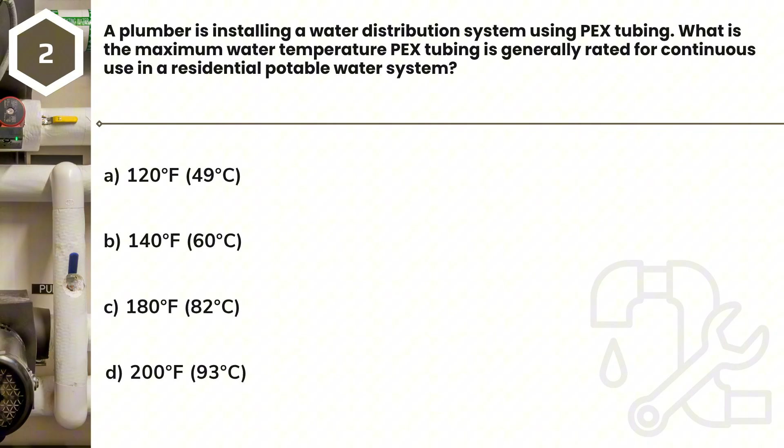Answer: C. 180 degrees Fahrenheit, 82 degrees Celsius. PEX, cross-linked polyethylene, tubing is a popular choice for water distribution systems due to its flexibility and durability, and it is generally rated for continuous use up to 180 degrees Fahrenheit, 82 degrees Celsius, at 100 psi, making it suitable for hot water lines and typical residential and commercial applications.

This temperature rating is crucial because exceeding it can compromise the material's integrity and lead to system failure. For example, if a PEX line were used directly on a superheated industrial system, it would likely fail. Always verify the specific pressure and temperature ratings for any pipe material before installation to ensure code compliance and system longevity.

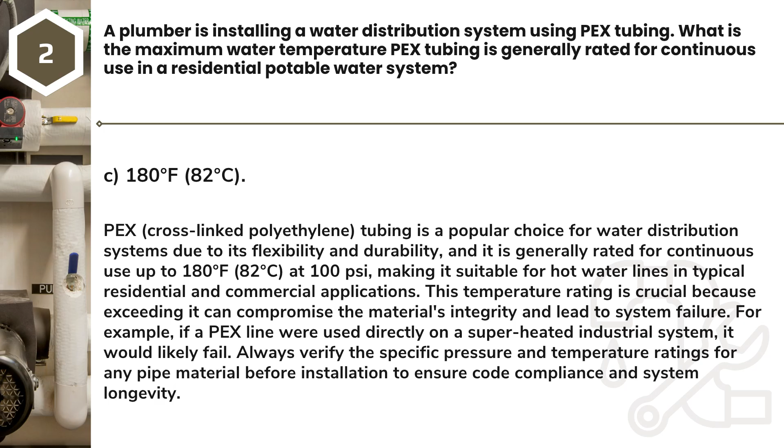Question 3. What is the primary purpose of a trap seal in a plumbing drainage system? A. To prevent sewer gases from entering the building. B. To increase the flow rate of wastewater. C. To provide an access point for drain cleaning. D. To equalize pressure within the drainage pipes.

Answer: A. To prevent sewer gases from entering the building. The primary purpose of a trap seal, which is the water held within the bend of a fixture trap, like under a sink or toilet, is to create a physical barrier that blocks noxious sewer gases from entering the occupied spaces of a building. This water seal prevents foul odors and potentially harmful gases, such as methane or hydrogen sulfide, from migrating back into the home from the drainage system.

Without a proper trap seal, residents would be exposed to unpleasant smells and health hazards. Remember, if a trap seal evaporates or is siphoned out, the protective barrier is gone, allowing gases to enter.

Question 4. A contractor has completed a plumbing installation for a new commercial building. Which of the following is typically the final required inspection before the system can be put into service? A. Rough-in plumbing inspection. B. Underground plumbing inspection. C. Final plumbing inspection. D. Slab plumbing inspection.

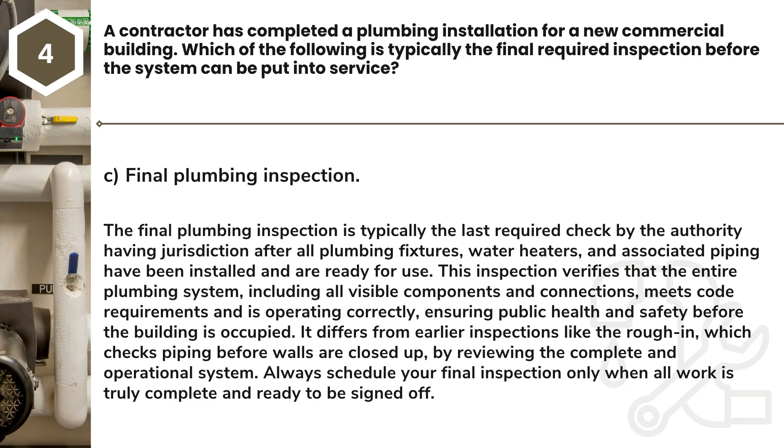Question 5. What is the minimum grade, slope, required for horizontal drainage piping that is 3 inches in diameter, according to common plumbing codes? A. 1/16 inch per foot. B. 1/8 inch per foot. C. 1/4 inch per foot. D. 1/2 inch per foot.

Answer: C. 1/4 inch per foot. Common plumbing codes, such as the Uniform Plumbing Code, UPC, typically require a minimum grade, slope, of 1/4 inch per foot for horizontal drainage piping up to and including 4 inches in diameter.

This specific slope ensures that wastewater flows efficiently by gravity, preventing solids from settling and accumulating within the pipe, which could lead to blockages. For example, a 3-inch drain line running 10 feet horizontally would need to drop 2.5 inches from start to finish. Proper grading is critical for effective waste removal and maintaining a clear drainage system.

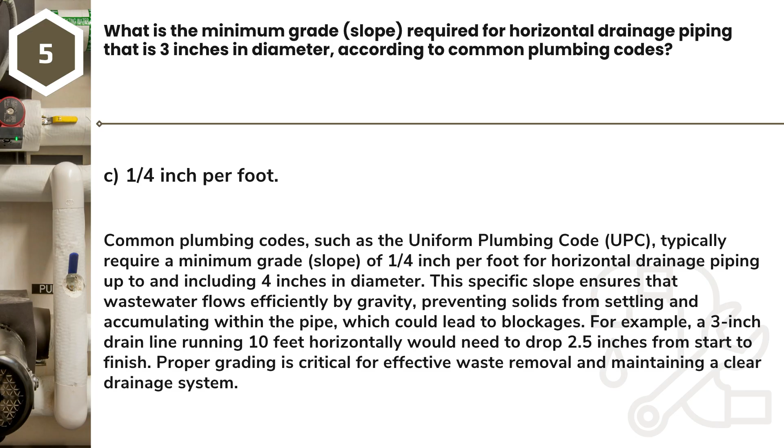Question 6. Under what circumstances is a plumbing contractor typically required to obtain a permit for plumbing work? A. Only for new construction projects. B. Only for work exceeding a certain dollar amount. C. For any installation, alteration, repair, or replacement of plumbing systems. D. For work performed in public right-of-way only.

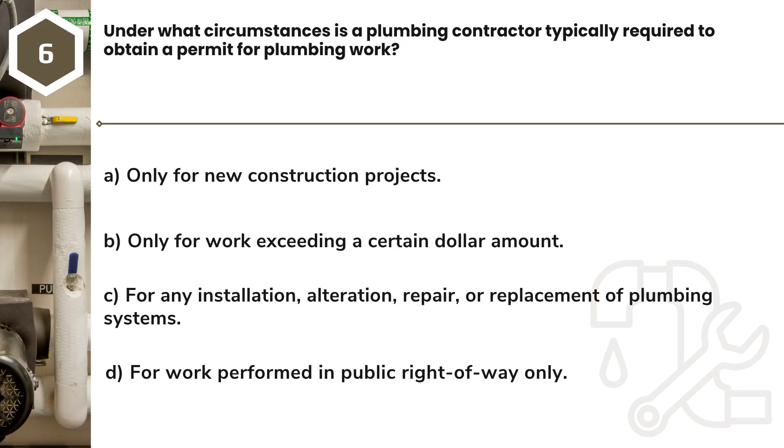Answer: C. For any installation, alteration, repair, or replacement of plumbing systems. A plumbing permit is generally required by the local authority having jurisdiction for almost any work involving the installation, alteration, repair, or replacement of plumbing systems, not just new construction. This ensures that the work complies with safety and sanitation codes, protecting both the property owner and the public.

For instance, replacing a water heater or rerouting a drain line in an existing home typically requires a permit and subsequent inspection. Always remember that permits are essential for legal compliance and to ensure your work meets established standards.

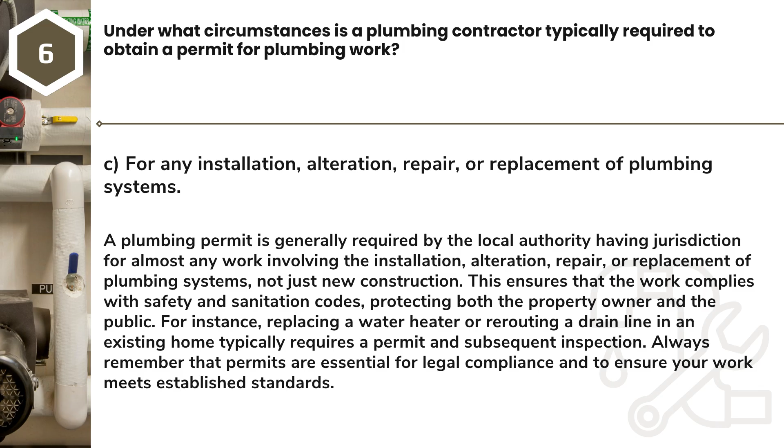Question 7. What is the primary function of a cleanout in a plumbing drainage system? A. To provide ventilation for the drainage system. B. To allow for visual inspection of wastewater flow. C. To provide access for cleaning and maintenance of the drainage pipes. D. To regulate water pressure within the system.

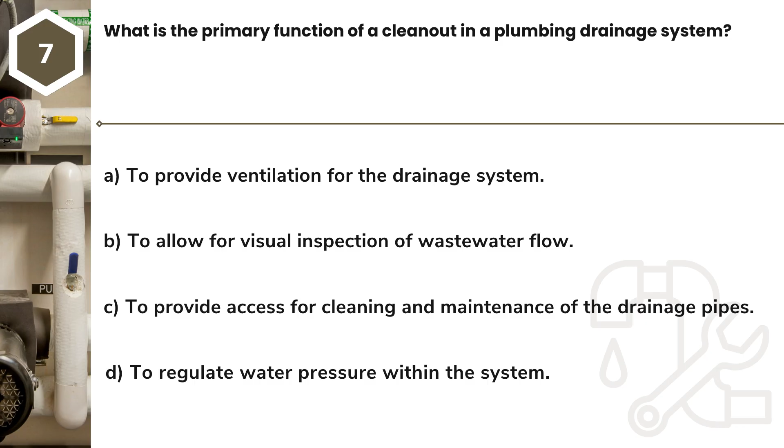Answer: C. To provide access for cleaning and maintenance of the drainage pipes. A cleanout is a fitting with a removable plug or cover that is strategically installed in the plumbing drainage system to provide convenient access for clearing blockages or performing maintenance. Without these access points, it would be much more difficult and disruptive to address clogs, often requiring sections of pipe to be cut out.

For example, a main building drain will typically have a cleanout near the foundation wall to allow a plumber to snake the line if it gets backed up. Proper placement and accessibility of cleanouts are critical for the long-term serviceability of any drainage system.

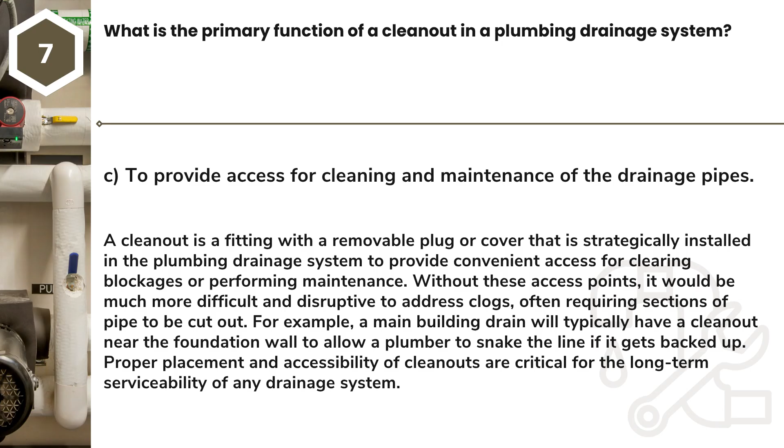Question 8. A plumber is installing a water heater. What is the purpose of the temperature and pressure, T&P, relief valve on a water heater? A. To regulate the water temperature for energy efficiency. B. To prevent the water heater tank from rusting. C. To release excessive temperature or pressure to prevent explosion. D. To increase the hot water output of the heater.

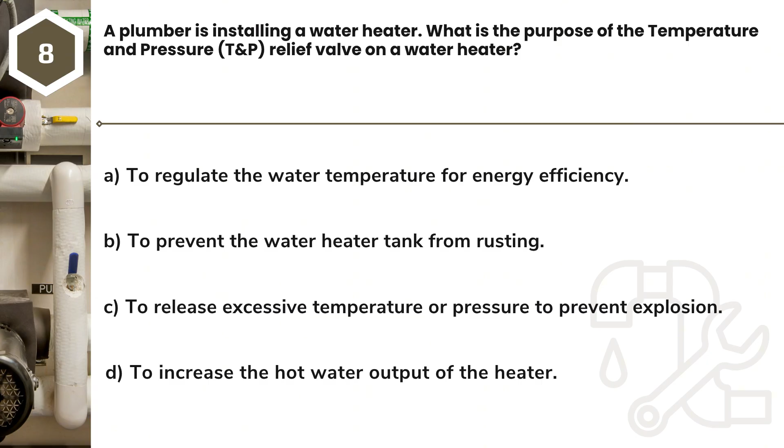Answer: C. To release excessive temperature or pressure to prevent explosion. The temperature and pressure, T&P, relief valve is a critical safety device on a water heater designed to automatically open and discharge water if the tank's internal temperature or pressure exceeds safe operating limits. This mechanism prevents the water heater from becoming a dangerous projectile due to extreme pressure buildup, effectively acting as a

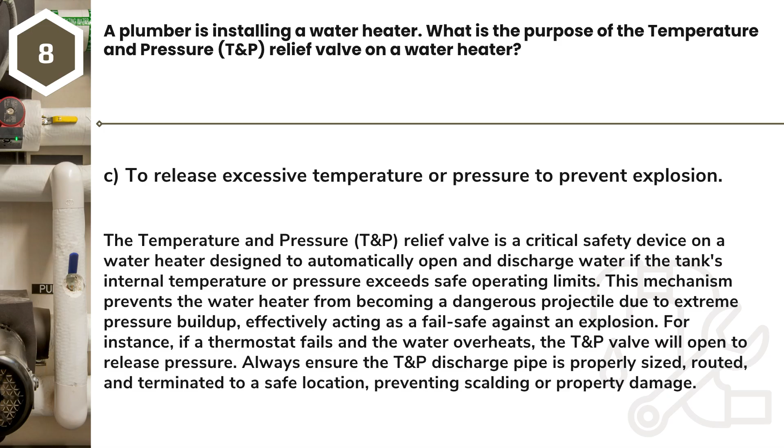fail-safe against an explosion. For instance, if a thermostat fails and the water overheats, the T&P valve will open to release pressure. Always ensure the T&P discharge pipe is properly sized, routed, and terminated to a safe location, preventing scalding or property damage.

Question 9. In California, what is the maximum amount a licensed contractor can charge for a home improvement project before a written contract is required by law? A. $100. B. $300. C. $500. D. $750. Answer: C.

$500. In California, the Contractors State License Law, CSLL, mandates that any home improvement contract for services, labor, or materials must be in writing if the aggregate contract price, including labor and materials, is $500 or more. This legal requirement is designed to protect consumers by ensuring clear terms, pricing, and project details are documented upfront, reducing

disputes. For example, if a plumbing repair is estimated at $450, a written contract isn't strictly required by law, but for a $550 water heater replacement, it is. Always use a written contract for any project approaching or exceeding this threshold to protect both yourself and your client.

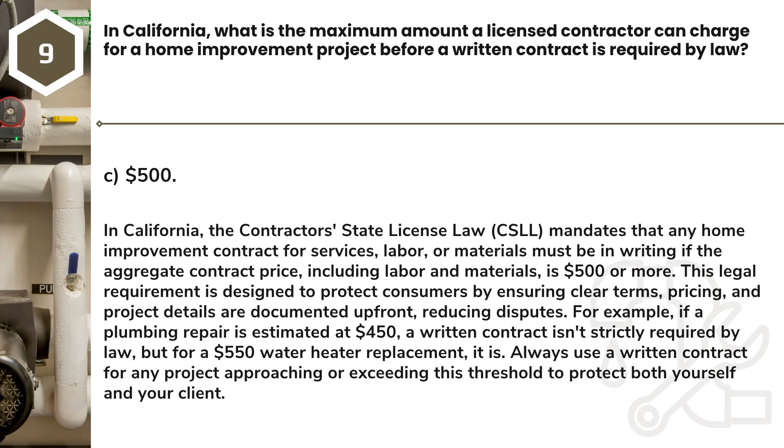Question 10. When installing an indirect waste pipe, such as a discharge from a refrigeration unit, what is the primary reason it must terminate into an air gap or air break? A. To conserve water. B. To prevent backflow contamination of the potable water supply. C. To reduce noise from the discharge. D. To allow for easier cleaning of the drain.

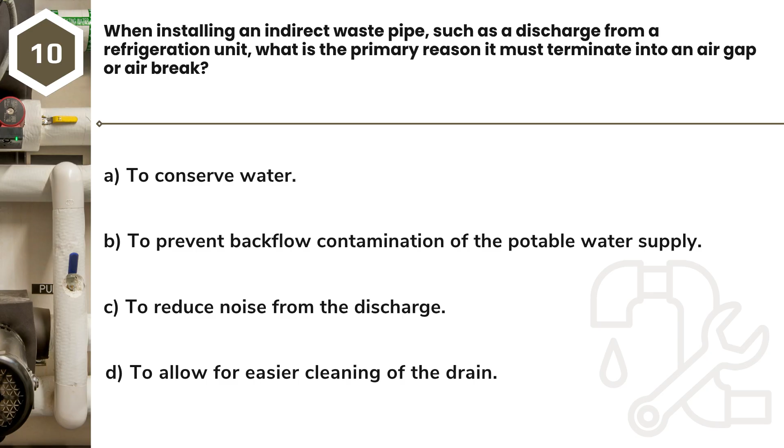Answer: B. To prevent backflow contamination of the potable water supply. An indirect waste pipe, which drains non-sewage waste, must discharge into a plumbing fixture or receptor through an air gap or air break primarily to prevent backflow contamination of the potable water supply. An air gap is a physical separation between the end of the drain pipe and the flood level rim of the receptor, while an air break is a less restrictive form of separation.

This prevents any possibility of contaminated wastewater, such as from a condensate pan or sterilizer, being siphoned back into the clean water system. Maintaining a clear air gap or air break is a fundamental backflow prevention principle to safeguard public health.

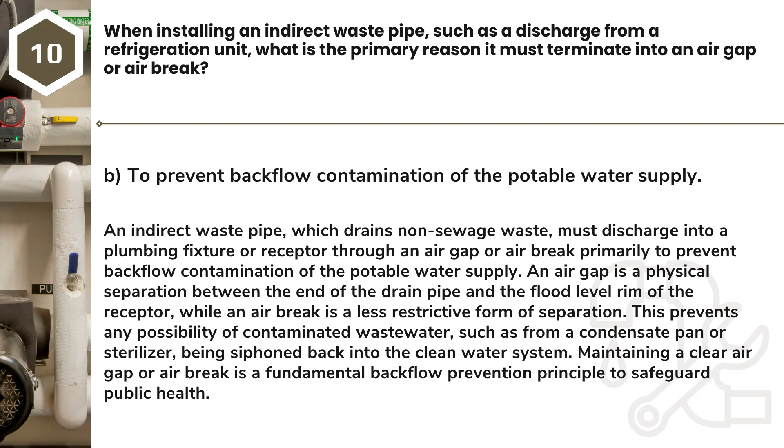Question 11. What is the minimum distance required between a water well and a septic tank system in California for new installations? A. 25 feet. B. 50 feet. C. 100 feet. D. 150 feet.

Answer: C. 100 feet. In California, local health department regulations, often based on state guidelines, typically require a minimum separation distance of 100 feet between a water well and a septic tank system for new installations. This significant distance is mandated to prevent the contamination of the potable groundwater supply by effluent from the septic system.

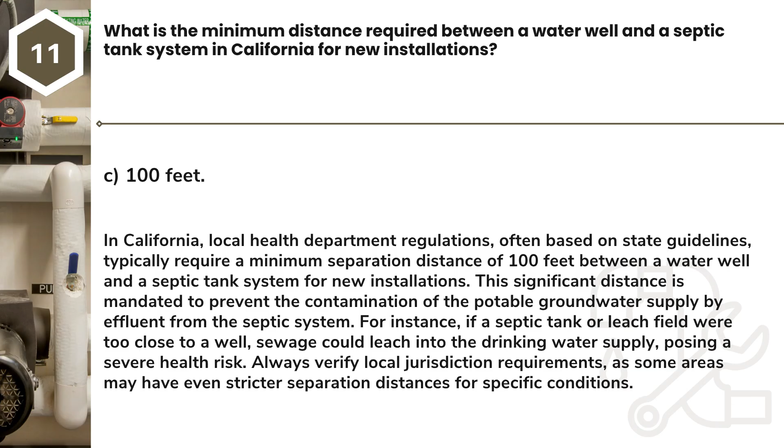For instance, if a septic tank or leach field were too close to a well, sewage could leach into the drinking water supply, posing a severe health risk. Always verify local jurisdiction requirements, as some areas may have even stricter separation distances for specific conditions.

Question 12. What type of backflow prevention device is typically required for a direct connection to a fire suppression system? A. Double check valve assembly, DCVA. B. Pressure vacuum breaker, PVB. C. Atmospheric vacuum breaker, AVB. D. Reduced pressure principle, RP, backflow assembly.

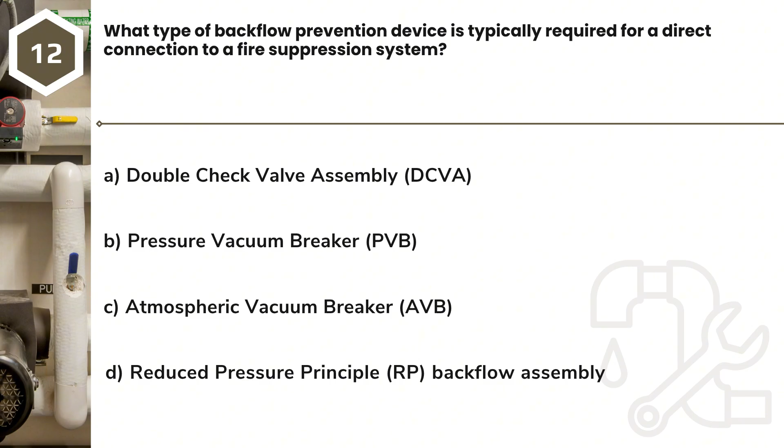Answer: D. Reduced pressure principle, RP, backflow assembly. A reduced pressure principle, RP, backflow assembly is generally required for direct connections to fire suppression systems, especially those that contain chemical additives or non-potable water, because it offers the highest level of protection against both backpressure and back siphonage.

This device features two independent check valves, an automatically operating relief valve located between them, and two tightly closing shutoff valves, ensuring superior contamination control. While a double check valve assembly, DCVA, might be used for some fire systems, the RP is mandated when the potential for health hazard contamination exists. Always select the appropriate backflow preventer based on the degree of hazard and local code requirements.

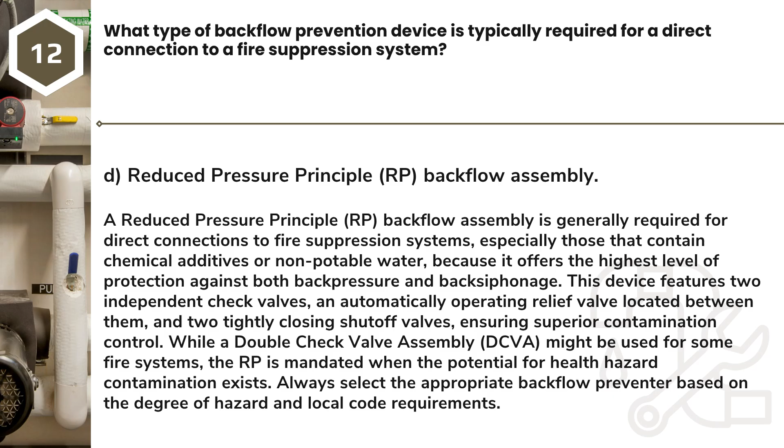Question 13. A plumbing contractor is hired to install a new toilet in a residential bathroom. What is the typical rough-in dimension, center of waste outlet to finished wall, for a standard floor-mounted toilet? A. 10 inches. B. 12 inches. C. 14 inches. D. 16 inches.

Answer: B. 12 inches. The typical rough-in dimension for a standard floor-mounted toilet, measured from the center of the waste outlet, flange, to the finished wall behind the toilet, is 12 inches. This standardized measurement allows for proper placement of the toilet bowl against the wall, ensuring stability and a clean aesthetic.

While 10-inch and 14-inch rough-in toilets are available for specific situations, 12 inches is by far the most common and is what plumbing contractors should plan for by default. Always confirm the rough-in dimensions for the specific toilet model being installed to avoid costly rework.

Question 14. What is the minimum required size for a water supply pipe serving a single residential dwelling unit, according to most plumbing codes? A. Half an inch. B. 3/4 inch. C. 1 inch. D. 1 1/4 inch.

Answer: B. 3/4 inch. Most plumbing codes, including the Uniform Plumbing Code, UPC, require a minimum 3/4 inch main water supply line to a single residential dwelling unit. This minimum size ensures adequate water volume and pressure to supply all fixtures simultaneously without significant pressure drops, even during peak demand.

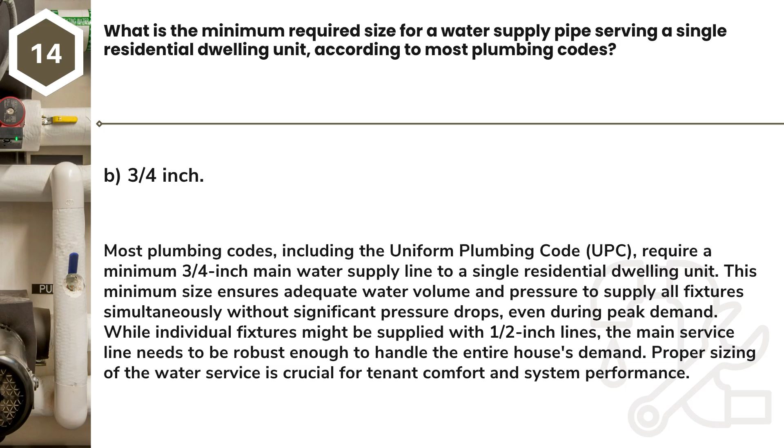Question 15. A contractor is replacing a section of cast iron drain pipe. What is the primary reason plumbers might still choose to use cast iron pipe in certain DWV applications today, despite the availability of PVC or ABS? A. It is significantly cheaper than plastic pipes. B. It offers superior resistance to extreme temperatures. C. It provides excellent sound dampening qualities. D. It is easier to cut and install.

Answer: C. It provides excellent sound dampening qualities. Despite being heavier and more challenging to install than plastic alternatives like PVC or ABS, cast iron pipe is often preferred in certain DWV, drainage, waste, and vent applications, especially in commercial buildings or multi-story residential structures, because it offers excellent sound dampening qualities.

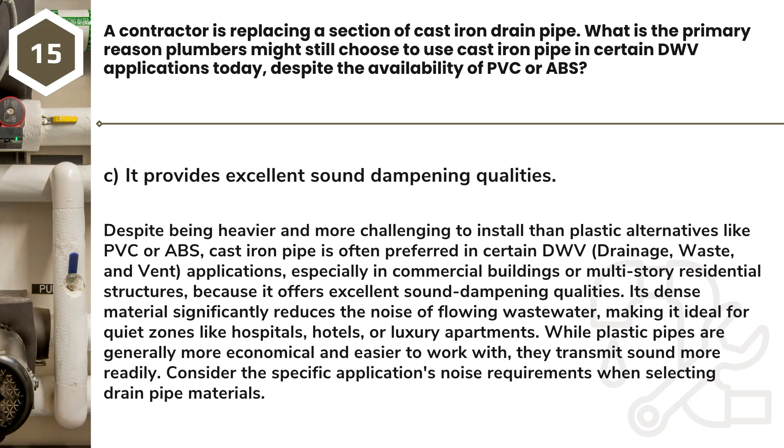Its dense material significantly reduces the noise of flowing wastewater, making it ideal for quiet zones like hospitals, hotels, or luxury apartments. While plastic pipes are generally more economical and easier to work with, they transmit sound more readily. Consider the specific application's noise requirements when selecting drain pipe materials.

Question 16. What is the purpose of a vent stack in a plumbing drainage system? A. To remove solid waste from the system. B. To introduce air into the drainage system to prevent trap siphonage. C. To regulate water temperature in hot water lines. D. To provide a pathway for fire suppression.

Answer: B. To introduce air into the drainage system to prevent trap siphonage. A vent stack is a vertical pipe extension of the main drain that extends through the roof, serving to introduce atmospheric air into the drainage system. This air equalization prevents a vacuum from forming when wastewater flows, which could otherwise siphon the water out of fixture traps, thereby breaking the critical trap seal. Without proper venting, drain lines could gurgle, and sewer gases would enter the building through siphoned traps. Proper venting ensures that the drainage system operates efficiently and safely by maintaining atmospheric pressure within the pipes.

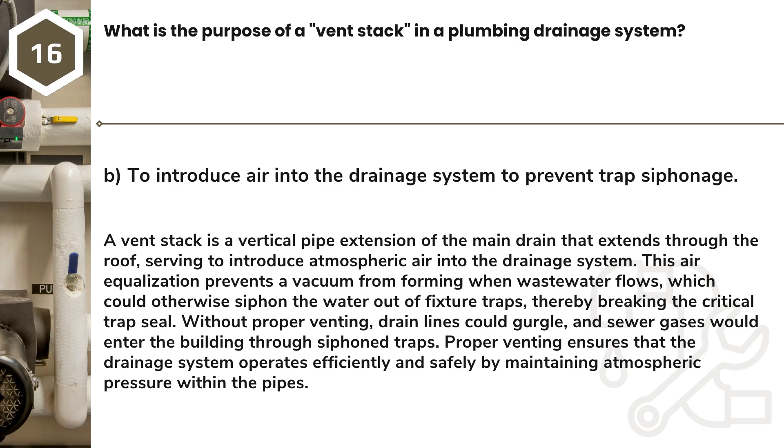Question 17. What is the primary purpose of a weep hole in the base of a shower stall or a water heater pan installation? A. To allow for decorative lighting installation. B. To provide a channel for pest control. C. To allow accumulated water to drain from behind the finished materials or from the pan. D. To provide an anchor point for the shower drain.

Answer: C. To allow accumulated water to drain from behind the finished materials or from the pan. Weep holes are small openings or pathways designed to allow any accumulated water to escape from behind or beneath a finished surface, such as the tile in a shower stall, or from inside a water heater pan. In a shower, they allow water that seeps through grout lines to drain into the shower base's subdrainage system, preventing mildew and structural damage. In a water heater pan, they indicate a leak from the tank, allowing water to escape before it overflows the pan and causes significant property damage. These small but critical features prevent water buildup and potential damage.

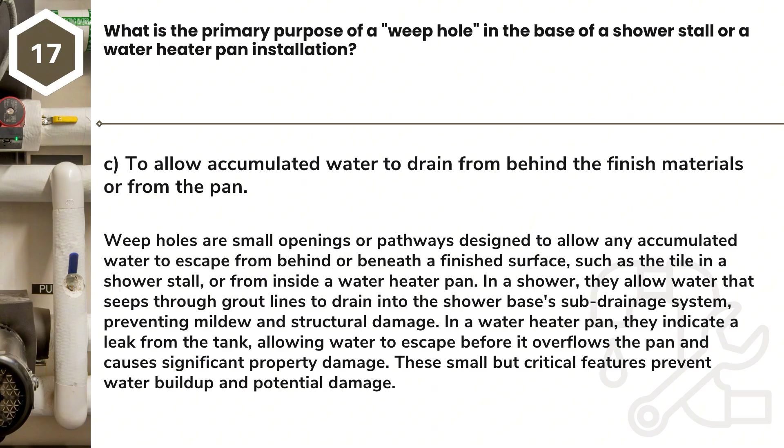Question 18. What is the typical maximum length for a fixture arm, the horizontal pipe connecting a trap to a vertical vent, before it must be vented individually, according to UPC standards? A. It depends on the pipe diameter. B. 3 feet. C. 5 feet. D. 10 feet.

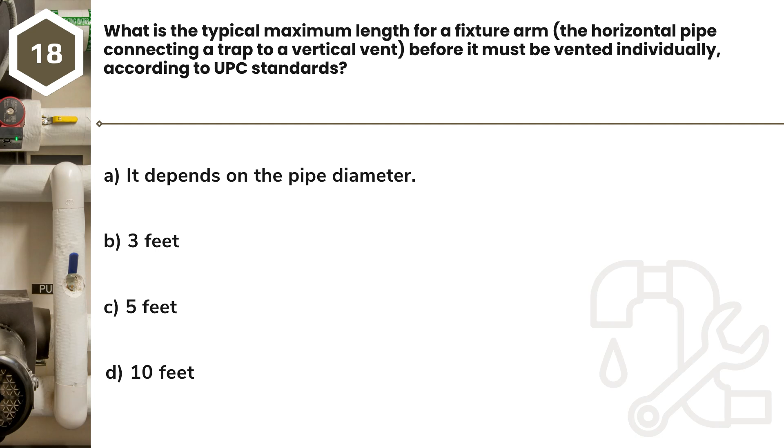Answer: A. It depends on the pipe diameter. The maximum developed length for a fixture arm, which connects a trap to a vertical vent, is not a fixed universal number but rather depends on the diameter of the pipe. For instance, a 1 1/4 inch pipe might have a maximum length of 2 feet 6 inches, while a 2-inch pipe might extend to 8 feet, as per the Uniform Plumbing Code, UPC, tables. This varying length ensures proper drainage and prevents trap siphonage by allowing adequate airflow based on the pipe's capacity. Always refer to the specific plumbing code tables for the exact maximum developed length relative to the fixture arm's diameter.

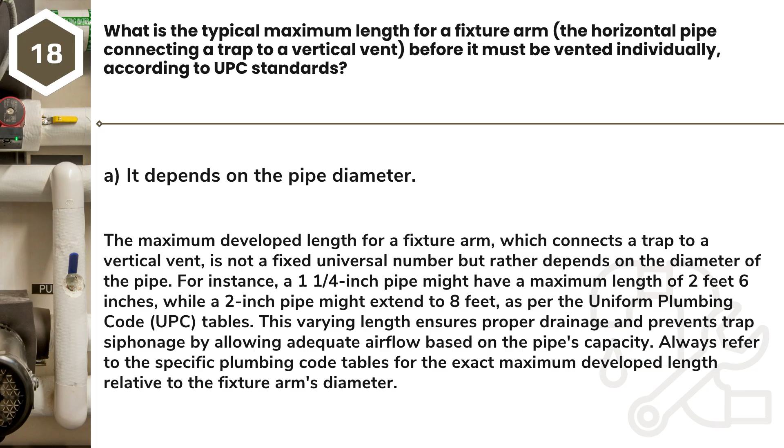Question 19. According to California Contractors State License Board, CSLB, regulations, how long must a contractor typically keep records related to a construction project, such as contracts, invoices, and payments? A. 1 year. B. 3 years. C. 5 years. D. 7 years.

Answer: C. 5 years. The California Contractors State License Board, CSLB, generally requires licensed contractors to keep records relating to construction projects, including contracts, accounting records, invoices, and payment records, for a minimum of 5 years. This requirement allows the CSLB to investigate complaints, verify compliance with state laws, and ensure proper business practices. For example, if a dispute arises regarding a project from 4 years ago, you must be able to produce the relevant documentation. Maintaining thorough and accessible records is a critical aspect of professional and compliant contracting.

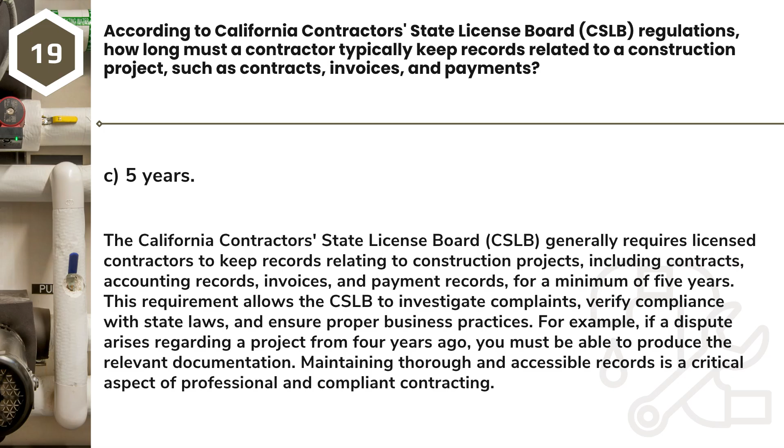Question 20. When performing trenching work for underground plumbing, what is the minimum required depth of a trench before protective systems, like shoring, sloping, or shielding, are typically mandated by OSHA? A. 3 feet. B. 4 feet. C. 5 feet. D. 6 feet.

Answer: C. 5 feet. According to OSHA, Occupational Safety and Health Administration, regulations, all trenches 5 feet or deeper must be protected from cave-ins by an adequate protective system unless the excavation is made entirely in stable rock. This critical safety standard aims to prevent serious injury or death from trench collapses, which can be extremely dangerous. For instance, if you're digging a trench for a main sewer line and it reaches 5 feet deep, you must implement shoring, sloping, or shielding immediately. Always prioritize safety in trenching operations. Never enter an unprotected trench 5 feet or deeper.

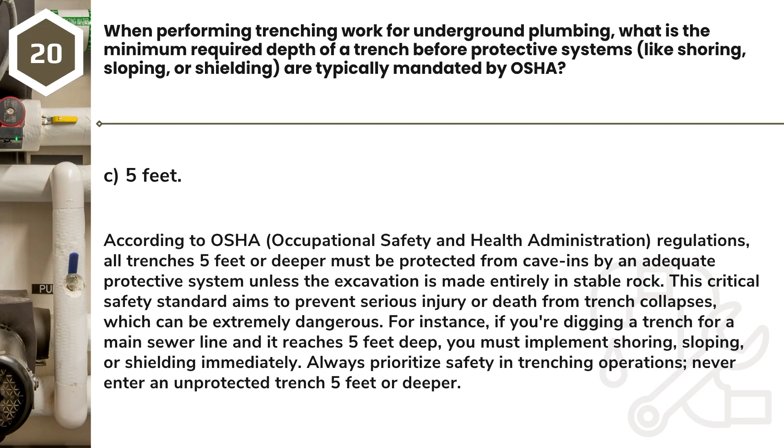Question 21. What is the primary purpose of an expansion tank installed on a closed-loop hot water heating system, like a hydronic heating system, or a domestic hot water system with a check valve on the cold water supply? A. To increase water pressure for better flow. B. To prevent the water heater from overheating. C. To absorb thermal expansion of water and maintain system pressure within limits. D. To filter sediment from the hot water.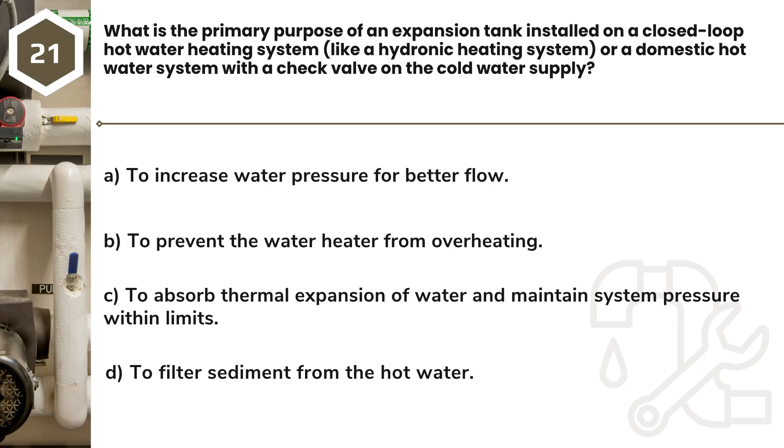Answer: C. To absorb thermal expansion of water and maintain system pressure within limits.

An expansion tank is designed to absorb the increase in water volume that occurs when water is heated in a closed-loop system, such as a hydronic heating system or a domestic hot water system where a check valve prevents water from flowing back into the main supply. Without an expansion tank, the thermal expansion would cause excessive pressure buildup within the pipes and water heater, potentially leading to relief valve discharge or even system damage.

For example, when your water heater heats up, the water expands, and the expansion tank provides a cushion for that volume change. Installing an expansion tank ensures system integrity and prevents undue stress on plumbing components.

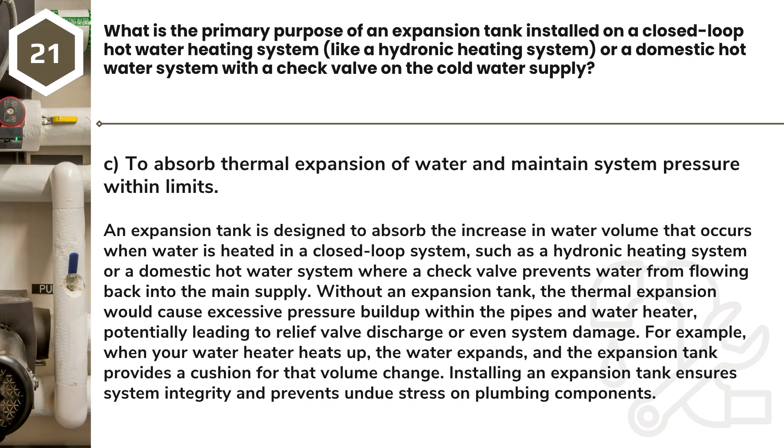Question 22. What is the most common method used to test a newly installed DWV, drainage, waste, and vent, system before it is covered or put into service? A. Air pressure test. B. Smoke test. C. Water test. D. Chemical dye test.

Answer: C. Water test. The most common and widely accepted method for testing a newly installed DWV, drainage, waste, and vent, system is the water test. This involves plugging all openings in the system below a certain level and filling the pipes with water to a specified height, typically to the highest fixture or to the top of the highest vent opening, and then observing for leaks over a period of time. This test effectively checks the integrity of all joints and pipes under hydrostatic pressure.

While air and smoke tests are also used for specific purposes, the water test is the standard for proving the initial watertight integrity of the entire system.

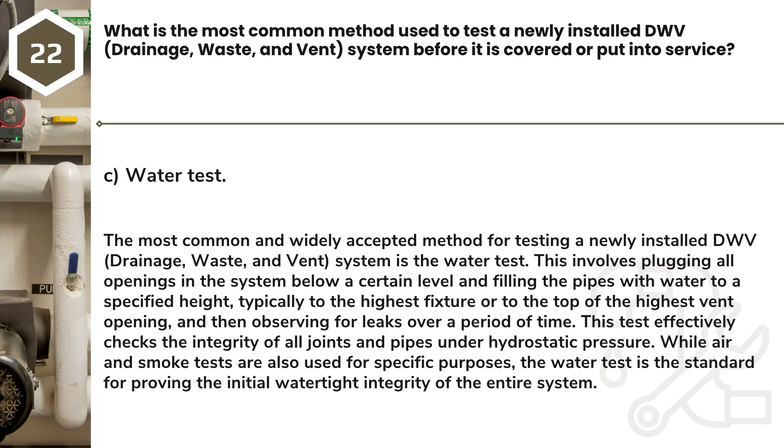Question 23. A plumbing contractor is considering installing a new water supply system using galvanized steel pipe. What is a significant long-term disadvantage of using galvanized steel pipe for potable water distribution? A. It is prone to immediate catastrophic leaks. B. It is very flexible and hard to keep straight. C. It is susceptible to internal corrosion and mineral buildup, reducing water flow. D. It cannot be connected to other pipe materials.

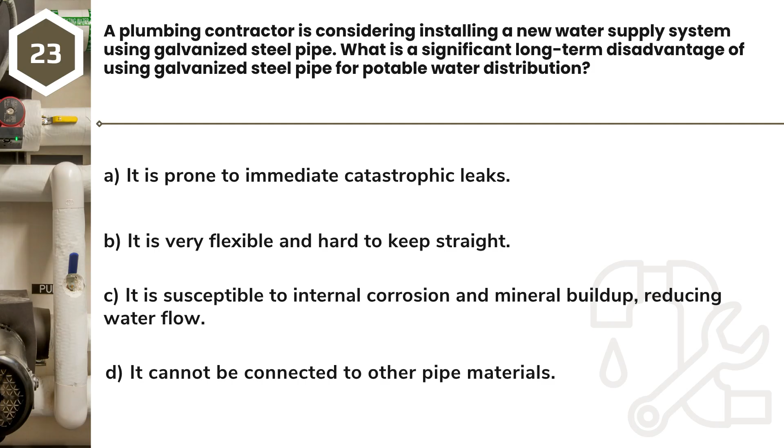Answer: C. It is susceptible to internal corrosion and mineral buildup, reducing water flow. A significant long-term disadvantage of using galvanized steel pipe for potable water distribution is its susceptibility to internal corrosion and mineral buildup. Over time, the zinc coating inside the pipe can degrade, leading to rust formation and the accumulation of mineral deposits within the pipe walls.

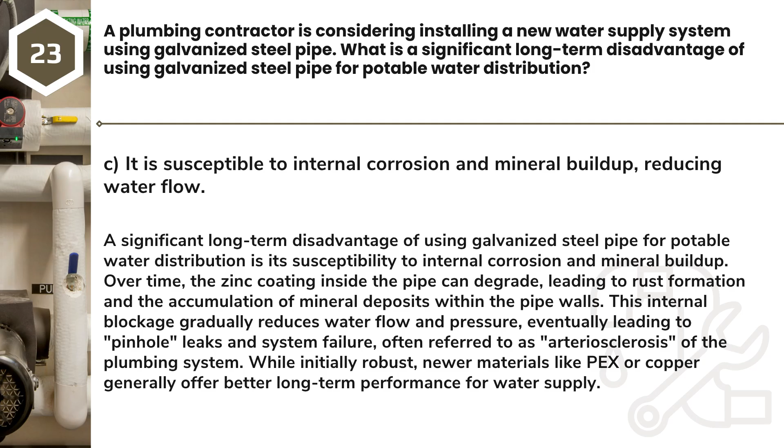This internal blockage gradually reduces water flow and pressure, eventually leading to pinhole leaks and system failure, often referred to as arteriosclerosis of the plumbing system. While initially robust, newer materials like PEX or copper generally offer better long-term performance for water supply.

Question 24. What type of valve is generally prohibited for use as a shut-off valve on the main water supply line serving a building due to its restrictive nature? A. Ball valve. B. Gate valve. C. Globe valve. D. Check valve.

Answer: C. Globe valve. A globe valve is generally prohibited for use as a shut-off valve on the main water supply line serving a building due to its inherent design, which creates significant flow restriction and pressure drop when fully open. Unlike ball or gate valves that provide a full-bore flow path when open, a globe valve requires water to change direction multiple times, leading to considerable friction loss.

While excellent for throttling flow, they are inefficient for applications requiring full, unrestricted flow. Therefore, full-port ball valves or gate valves are preferred for main shut-off applications to ensure maximum water delivery.

Question 25. What does the term cross-connection refer to in plumbing, and why is it a critical concern? A. A connection between two different pipe materials. B. Any actual or potential connection between a potable water supply and a non-potable source. C. The intersection of two main drain lines. D. A connection point where water pipes cross electrical conduits.

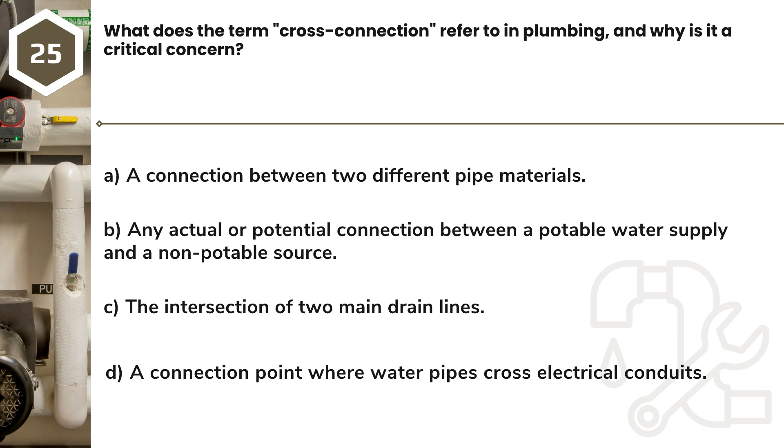Answer: B. Any actual or potential connection between a potable water supply and a non-potable source. A cross-connection refers to any actual or potential physical connection between a potable, drinkable, water supply and a non-potable, non-drinkable, source, system, or liquid containing contaminants. This is a critical concern because it poses a significant health hazard, allowing contaminated or polluted water to be drawn back into the public or private drinking water supply through backpressure or backsiphonage.

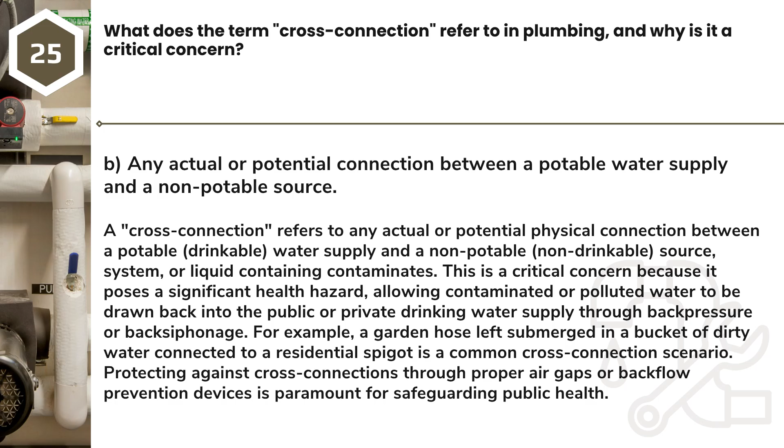For example, a garden hose left submerged in a bucket of dirty water connected to a residential spigot is a common cross-connection scenario. Protecting against cross-connections through proper air gaps or backflow prevention devices is paramount for safeguarding public health.